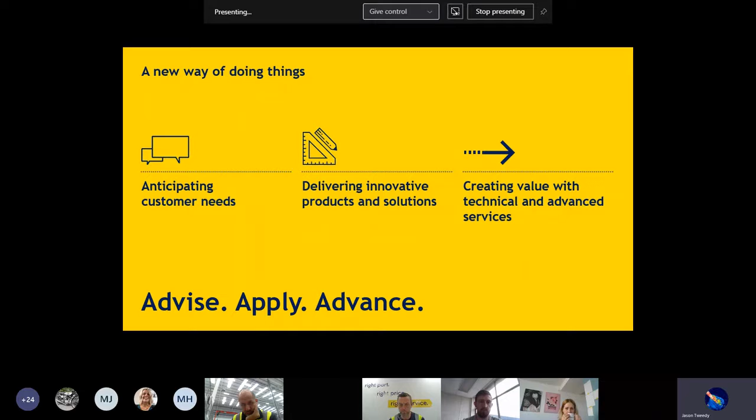To start with some introductions from our side, my name's Jason Tweedy and I am the head of UK Reliability Services for Brammer Buck & Hickman. I started out my working life as an apprentice for Audi as a technician. I've currently been with Brammer Buck & Hickman for 10 years. I started out with Brammer as an inside support and I've worked my way up. I'm now currently qualified and experienced to BINDT and SNT standards in vibration analysis and thermography. And I'm currently part of Rubix's European team on innovation and technical development of technologies relevant to today.

Good morning, everyone. My name is Antony. I'm the Group Technical Director for PCMS Eng Group. We are the Brammer reliability partner in the UK. So a bit about my background: I'm originally from an electromechanical background in the repair industry. I actually started with Dowding and Mills some 22 years ago, which seems like yesterday. I've been involved globally with various different clients, multiple industries, different maintenance and reliability techniques over the years.

I'm also part of the British Institute of Non-Destructive Testing group committees for general condition monitoring, where we're currently developing a new training standard for general condition monitoring, as well as the vibration analysis working group, where we look at examination criteria and so on. And I've recently become part of a BSI standards committee for two vibration shock standards for ISO standard development.

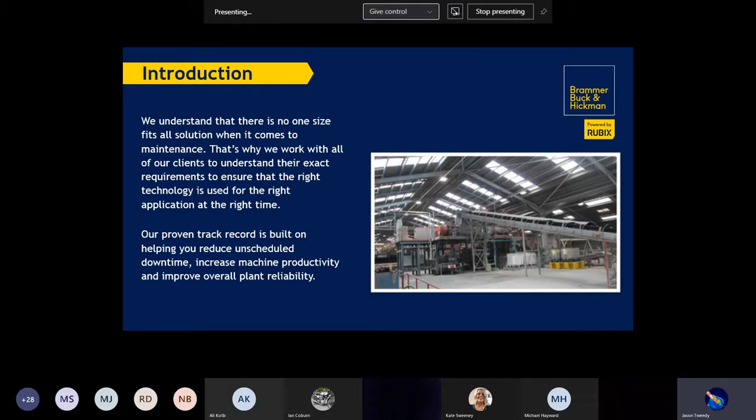So today's approach in this presentation is essentially to give you an overview of reliability services, why we perform these services, and the potential benefits of these to your business. Over to you, Antony. Thanks, Jason.

We cannot sort of assess from a one-shot reading that a bearing will have 2 weeks life remaining or whatever the interval may be. There are a lot of factors that have a significant effect on the failure rates, the failure propagation, between that problem detection through to the functional failure point.

And the main areas that affect that are speed - different speeds. Obviously, the higher the speed, typically the faster the rate of failure on particular assets. Increased load: if the load increases, typically the opportunity before functional failure, the time window reduces. Also maintenance quality, which is a big one, and environmental conditions.

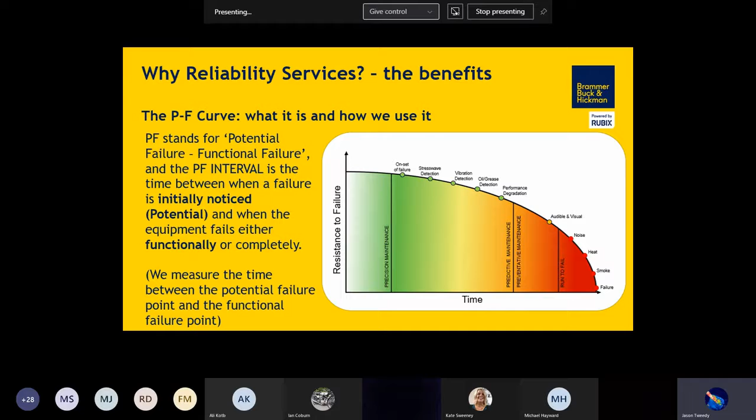Now, in terms of the definition of CBM, a lot of people get this wrong. A lot of people call it condition-based monitoring, which is incorrect. It's actually condition-based maintenance.

So we're talking about maintenance on condition. If you regard CBM as a toolbox, condition monitoring, performance monitoring, standard PPM checks all technically form part of a CBM toolbox. That robust CBM strategy can form multiple assets and different tools and techniques within that. It's not just about the technology, it's as much about human sensors and what are the performance criteria being monitored by certain systems. So where CBM is selected as a strategy, we want to monitor and maintain based on condition instead of just on a time basis.

Then there's key elements that can be experienced from a client perspective as well. We have increased asset reliability. We reduce the maintenance spend as a potential because we're able to plan and optimize repairs. We're able to get spares on just-in-time delivery rather than keeping a huge portfolio of spares in the stores, so we can look at the schedules in place to optimize that as much as possible. Now, this leads to potential increase in productivity because the availability would increase. We're reducing that downtime, we're trying to reduce that interval for maintenance and that mean time to repair. We're trying to reduce the costly failures and make it so that things are small, concise changes and remedial actions to bring that unit back to standard.

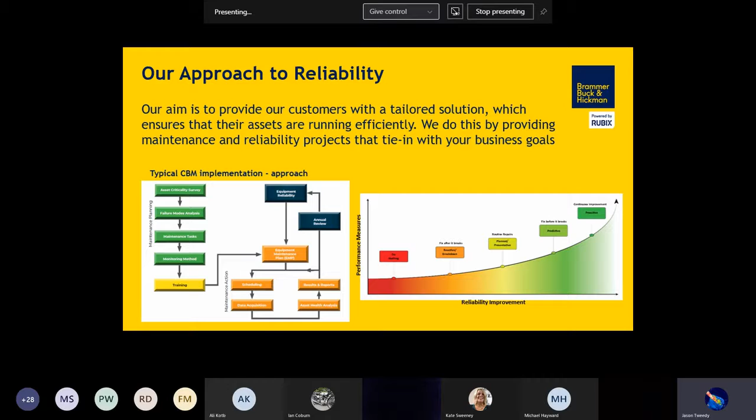Now, the same business can run 2 different sites. Indeed, you can have 10 of the same assets on the same site. They can all operate in a different way, and therefore you need to apply CBM techniques and general maintenance strategies in a completely different way. So as much as we provide the data, the data provides a method of data-driven decisions, as opposed to being subjective and opinionated, it's more around the data to make those decisions in the first place. So there is not one hard and fast rule. You cannot buy something off the shelf and it gives all the answers. Unfortunately, it doesn't work like that. I wish it did, but it doesn't.

Thank you, Anthony. So Brammer Buck & Hickman decided to go into partnership with the PCMS Group for several reasons. The main benefit for all customers is providing a reliable CBM service tied into a fast, effective and high quality repair service. Essentially, if we find something wrong with your equipment, we are able to remove it, inspect it, repair it and return it quickly, and even reinstall correctly if you require. It also means between us, we can give you full UK coverage staff-wise for both repairs and CBM, boasting 40+ engineers out on the road with another 18 behind the scenes repairing your equipment. This also includes hydraulics.

PCMS also have their own independent oil laboratory, meaning market-leading reports with customer-favourable pricing. We are, between us, able to provide accredited training in all aspects of reliability, including CBM data collection tools, analysis, and installation maintenance techniques, and are also a BINDT approved training centre. On the back of all of this, we can bring in our Rubix category specialists to look into any long-term issues or problems that require specialist attention.

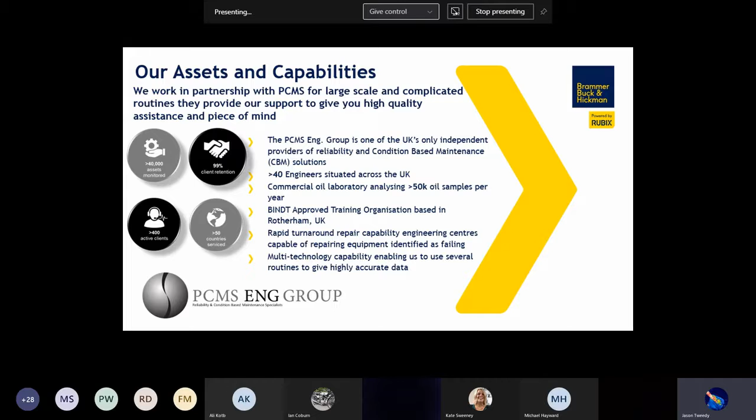So whether you're looking at new machines or newly overhauled machines, making sure assets are in good condition before going back into service, or you're dealing with aging assets, PCMS and Brammer have the tools and technologies available to understand the condition of the machines and also the structures that these machines sit on.

From that perspective, there is not one hard and fast rule. You don't need significant amounts of historical information to make an asset assessment. We can perform things such as one-off health checks to give an indication of the condition of those assets. But let's delve into some real specific details and applications.

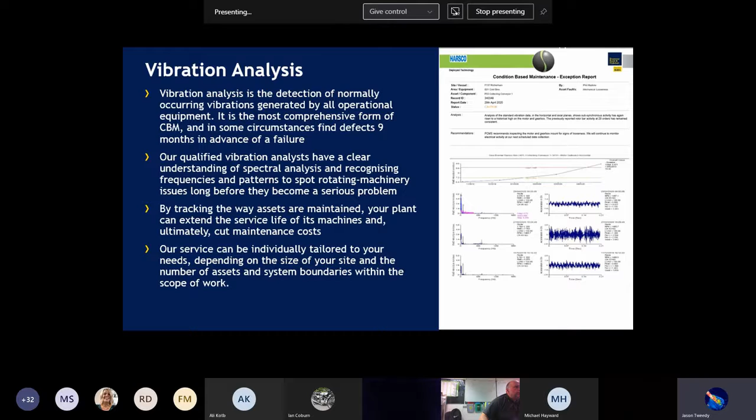So we can act as a complete independent from that perspective. Whatever the size of the business or the number of assets, it's flexibility. There is not one size fits all, as I've mentioned several times. It's whatever is correct for your particular business model, for your business needs. What are the short, medium, and long-term goals?

A lot of the clients that we work with may well start off with a fully outsourced program where we provide the engineering expertise, where we provide on-site services, we provide the data collection, the analysis, the comprehensive reports, and any management expertise that come with it, as well, as you can see on screen with some of the graphs from our Amiga system.

A lot of our clients want to move towards a degree of self-sufficiency, so wireless techniques are now coming to the fore. Online systems are still available also, but also handheld systems are now becoming more accessible to people at site level, so that there is a degree of the want and the requirement for self-sufficiency.

So the next step in that process, moving from outsourced to a hybrid approach, is an element of where we may still provide some routine services on site, but some of the data collection is carried out by you guys, your teams on site, as you develop your reliability teams and so on.

We can provide the necessary training and expertise and technical support that comes with that to provide you with the best opportunity to leverage the benefits from that as an approach, with a view that self-sufficiency may be the next step, where we may be just a supply chain, we provide the training and then just the technical support. We're there on hand with our remote services as required to provide the assistance as and when needed.

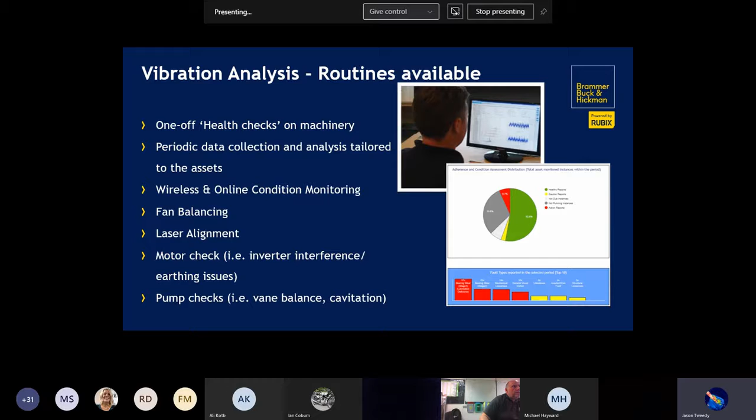Just an example of the power of the data and the approach that we provide. This is a combined PCMS and Brammer client. It's a major UK building product manufacturer. They've used one of our competitors for a long period, and this is not about poo-pooing any competitors, by the way. That's certainly not in our remit.

This is about a client that was in need. So they had an existing supplier. They experienced two major failures, one just before Christmas and one between Christmas and New Year. The same fan, as it was the same failure mode. We've all experienced the 3 o'clock in the morning call outs or the Christmas Eve call outs. We don't want to be in that position. Our job really is to remove the pain and the burden of that, to make sure that that doesn't happen again within your operation and production settings.

So from our perspective, we got a bit of background on this. There was a recent data collection and analysis from the incumbent, didn't show any issues, but the client had concerns because there was a noise, as he described it, from the fan, and he could experience the vibration just by touch and feel. Again, back to the human senses, which are very important.

So we were asked to attend with Brammer to assess and complete a bit of a health check on this fan, and also to fit a temporary wireless monitoring solution, because the concern was changes within the production setting, so air temperature differences. This was also a variable speed fan, so as the variable speed changed, the vibration was noticeably different through different cycles.

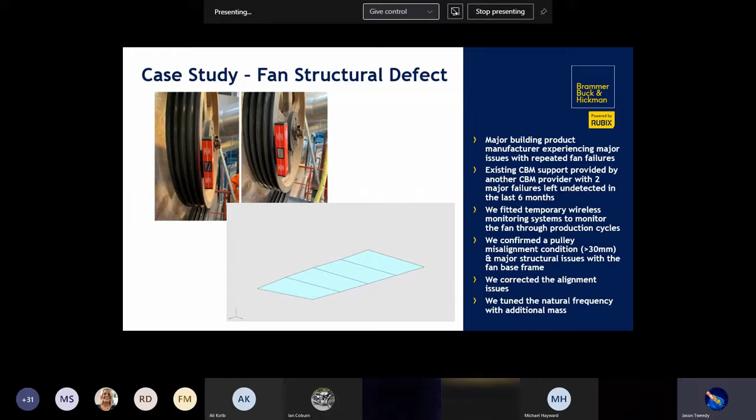And we also carried out a full operating deflection shape model, which determined we've got a major structural weakness, as you can see from the animation. The bit that's flapping around is actually the motor end, which is where the majority of the vibration was being detected. We tuned the natural frequency by adding additional mass. I'll not explain how we added mass, but I'm sure you can imagine. But it allowed the client to drive that fan through to a maintenance period for a major overhaul. So just one example there.

Jason. Thanks, Anthony. So moving on to air leaks. Air leaks are one of the biggest recoverable costs to industry. The issue being that most sites do not recognise the connection between air leaks and high air usage, and the relative costs. Compressor usage, as you can see, makes up the biggest cost of a compressor's life.

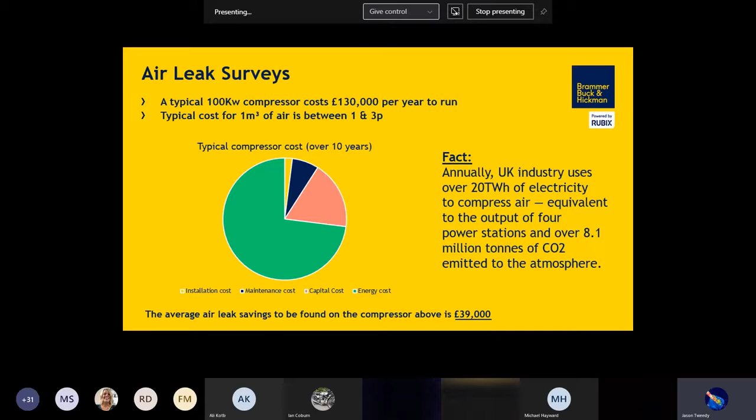This highlights that energy costs are the biggest factor over its life, and that air leak remedials are a quick and sensible solution to reduce this. As a quick example of this, a food production factory in Yorkshire recorded a £217,000 survey in March this year and signed off on a £200,000 cost saving after taking into account the labour time and spares required to repair.

So for the typical start to finish routine, we are asked to go to site to discuss an air leak survey. Once on site, we ask typical but important questions about your compressors and general air systems. We also walk around to scope up the time it will take to perform. We detect the leaks with state-of-the-art leak shooters, which visualize the leak and record the amplitude. The image is also used in the report for evidence.

We record the details of the leak on our own software, which has been designed around customer requirements to give you reports with relevant and accurate information. We also tag the leaks with metal detectable tags where possible, which means finding them to remedy is made easy for you. For ATEX required sites, we are able to use equipment that is safe on site. It does mean, however, no pictures can be taken, but the data recorded is just as accurate otherwise.

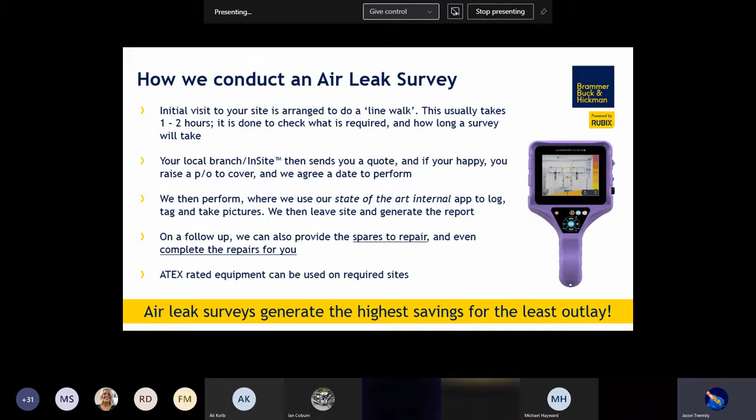Also to highlight, our surveys are also COVID friendly. The way the surveys are conducted means we rarely need to be in contact with people or to touch your equipment. Just on screen are a few example pages of the report that we can generate. The survey can also provide remedial parts lists, estimated time to repair, and also if required, we are able to facilitate the repairs ourselves.

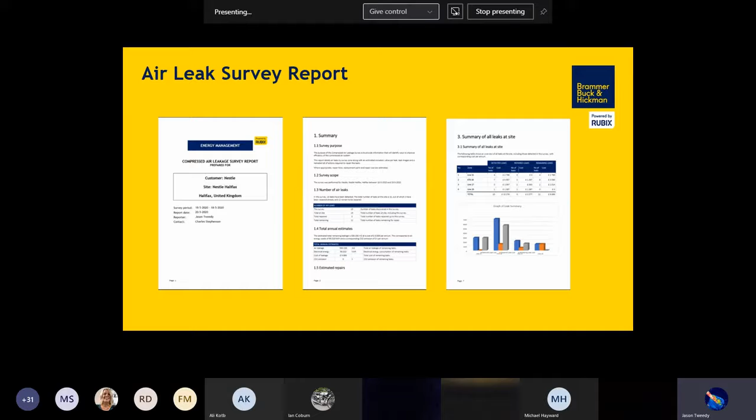The report also breaks down each area, so you can identify critical points or prioritise where to concentrate remedial fixes first. We also are able to log the CO2 emissions created powering these leaks, which if used to fix, helps with obtaining your ISO 50001 accreditation for energy efficiency.

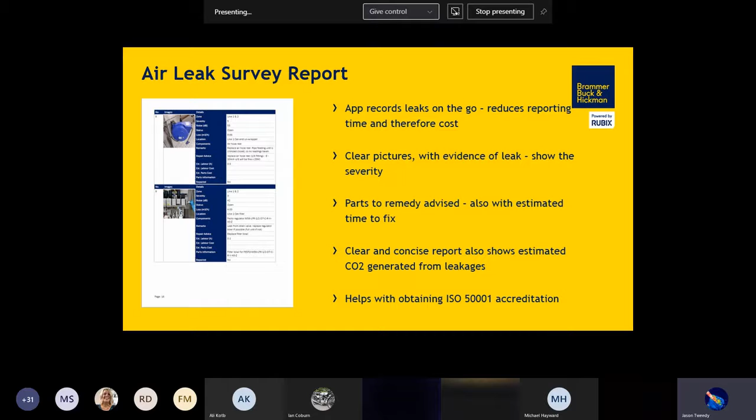So moving on to hydraulic oil cleanliness. So with our hydraulic centres, we are now able to offer you contamination control on your hydraulic systems. The concept of this works similar to the other CBM technologies we've mentioned. We install a particle counter onto your running power pack, which checks constantly over 10 to 15 minutes the status of your hydraulic oil, logging particle counts and other information.

We then present to you this information and talk you through what this means and what remedial action you may need to take. It is a sealed system, meaning the data taken isn't affected by outside contaminants and works whilst your equipment is running, so there is no downtime, is simple and quick to fit, and allows you to see live data concerning your equipment.

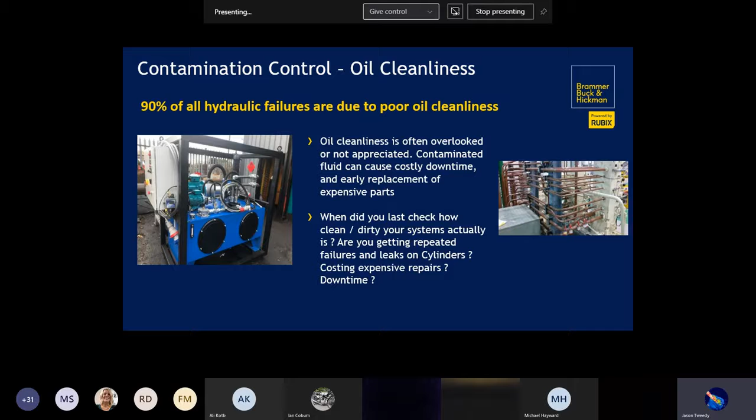If action is required, either an oil change may be suitable or a simple flushing rig may allow us to filter the oil to bring it back up to the correct standard. The flushing rig works by creating a closed circuit in your hydraulic system and forces the oil around turbulently at high pressure, picking up debris and contaminants where the high-end filtration system then filters out. The unit also contains a particulate sensor and so continues to filter until the sensor indicates that the contamination level has reduced to a preset acceptable standard.

Different size rigs are available. The usual hire time is around about 5 days as an average, but we can discuss your requirements, visit your site and quote on your needs appropriately.

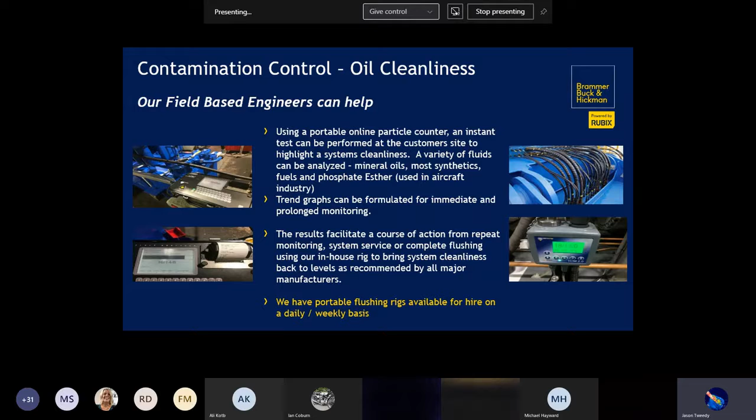So further to the oil cleanliness side, within the PCMS Eng Group, we also have our own commercial oil laboratory, as you may have seen on the previous slides. So lubricant analysis really is looking at monitoring the health not only of the oil but also of the asset itself, and that's one of the key differentials from our perspective. So we're a complete independent oil laboratory. We're not involved with any oil suppliers or manufacturers, so there's no conflict of interest from that perspective.

So where our reports are providing a third-party view, we're really looking at those assets to ensure that that oil is fit for purpose. It's not just about a procurement exercise. It's not related to cost. If the oil is not fit for purpose, the reports will tell you that it's not fit for purpose. But essentially with the oil and grease testing, we look at oils from gearboxes, white metal bearings, from hydraulic systems. We also test used grease samples as well to look for any contaminants that exist within grease.

Really, we're looking at the lifeblood of that machine. So you may have heard that terminology before. It's the same as going for a blood sample at the doctor's surgery in effect. So it gives us a great insight to the running conditions of the asset as well as the condition of the lubricant that exists within.

So when we're collecting an oil sample, whether we're performing the oil sampling or whether we're providing the kits for your guys and your reliability teams on site to complete the sampling, we provide everything that's required. So it's the syringe, it's the vampire pump, the pipe work, the bottles, the labels, which could be pre-printed with predetermined assets information. But as I mentioned earlier on with the crap in, crap out scenario, the more information that can be provided with any sample or data collection technique really does provide key information to improve the accuracy of any analysis.

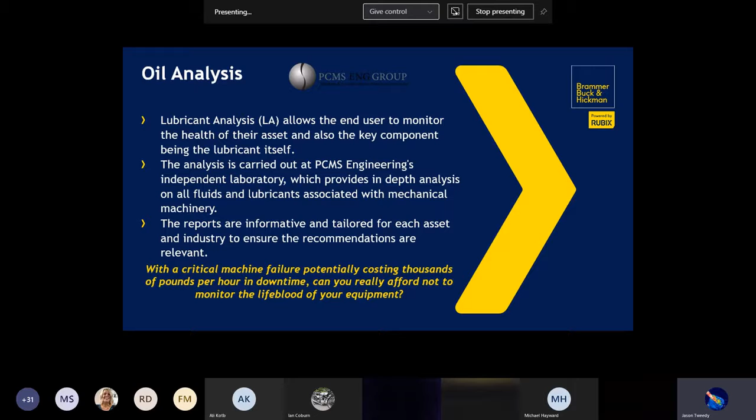So from that perspective, with the potential failure modes that exist on a lot of our critical assets, can we really afford not to have that understanding for what is essentially quite a low cost per sample, the oil sample analysis and the kit that you can collect the sample with? So as long as the sample technique is correct, then obviously we get some good information from that on failures.

We currently process around 50,000 samples per year in our laboratory from multiple clients globally. Our staff are ISO and BINDT trained to lubricant analysis level 1 or level 2. But it's also backed by engineering knowledge as well. So yes, we have chemists. We also have a team of engineers that back up the laboratory as well, so that the output from our reports, as I said earlier on, would never be there's just an increase in copper. It would actually give an indication on where is that copper coming from. We would delve into understanding the asset, where that contaminant or where indices could be coming from.

So we have all our reports that are posted on our cloud-based asset insight tool, which is OMEGA, which is available 24/7, doesn't require any IT software installation. It's on a HTTPS secure system as well on a website. So from that perspective, it also encompasses information from vibration analysis, oil analysis, thermography, any of the techniques applied in CBM, and also any inspection techniques as well that we collect during our standard routines. So really it pulls all the pieces of that jigsaw together to give it all on one view. It's license free, any logins as required, which is a big benefit.

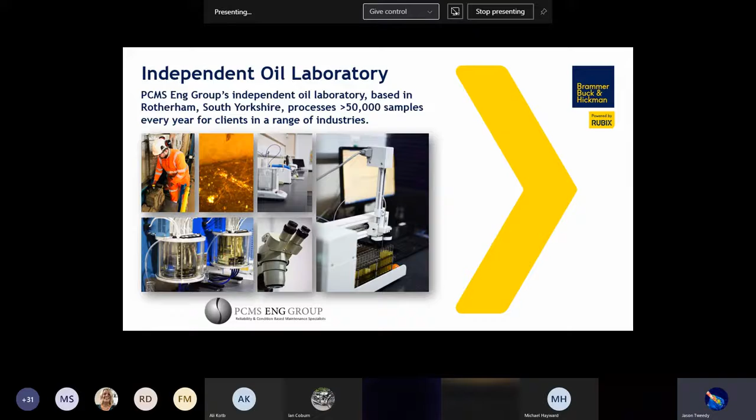We've also recently introduced turbine oil sample testing as well within the laboratory, which is quite a specialist piece of equipment for looking at the remaining life expectancy of oil samples. So when you're looking at the outputs of the oil reports, they're typically split into a trivector, which by definition has 3 sides. So we're looking at the wear elements, the contamination index, and the chemistry. When we're looking at the chemistry, for example, we're looking at additive packages, the level of viscosity, the general lubricant performance, is it still fit for purpose, is it showing signs of oxidization, and so on.

At this instance, we may actually compare that with what is termed as a virgin sample or a barrel sample to understand what the oil was at the outset when it was in the barrel before it went into the asset itself. By performing that check, we can directly compare what it should be to what has come out of the unit itself. And that opens up a window of opportunity to understand, is it past the end of its useful life? Is there an issue with dilution of some other oil type within there where perhaps the lubrication management standards are not up to scratch on site? So there's various elements within that chemistry arm that provide that required information.

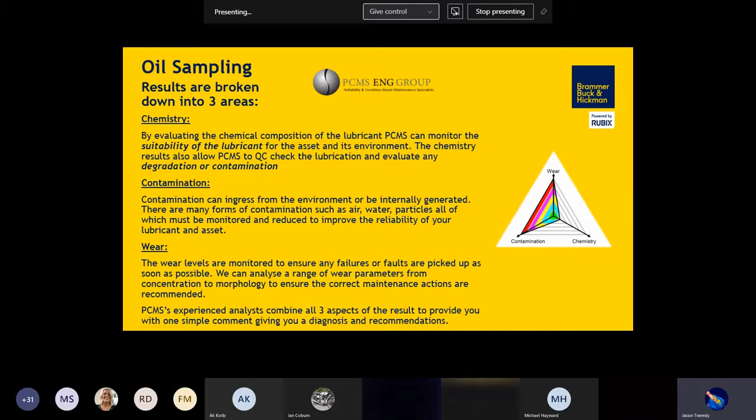Contamination, so this could be internally generated, or it could be generated during the sampling itself if the sampling is not done to the correct standard. But it could also be abrasive dirt that's got into the system due to a seal failure. It could be water, could be fuel dilution within an engine or a piston ring problem, and so on. And down to the wear indices, where we're looking at specific particular elements that show friction, abrasion, and erosion particles where surfaces are moving together, or it could be from corrosion as well if moisture exists within the system. And we look at the size, the shape, the material of the part. Yes, it's wearing, but how is it wearing? What is causing the problem?

So from an oil analysis perspective, we regard our services as a managed service. We do carry it out on multiple different assets. Our oil analysis service is not just about the oil condition, it's about the asset condition. As I've mentioned, we've got the analysis. We're also a BINDT accredited organisation to deliver training to BINDT Category 1 and Category 2 for lubricant analysis. And obviously, I've mentioned the cloud platform as well.

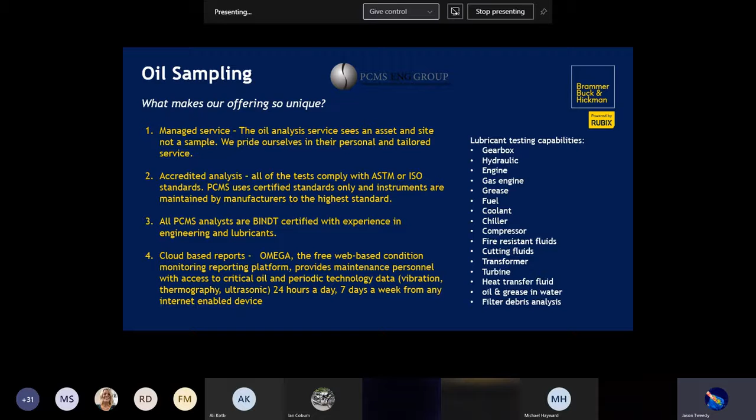Very briefly on a case history, which is a bit of a strange one. It's not always just about used oil analysis. This is an example of an oil hydraulic system where the filters were continuously blocking up with no specific explanation as to why. So we were basically sent the entire tank, which was amazing and quite interesting. So through microscopic analysis, we determined that it was non-ferrous particulates that were in dispersion within the oil.

We actually went about to take what were termed as core samples. So we took a hole cutter, for want of a better description, with various tests with different oil types, different temperatures, different pressures, to determine what could be happening within that particular system. And what was actually found was, almost like a perfect storm, through various temperatures and pressures, the tank itself was actually starting to delaminate. So that was the particulate that was going into circulation within the system.

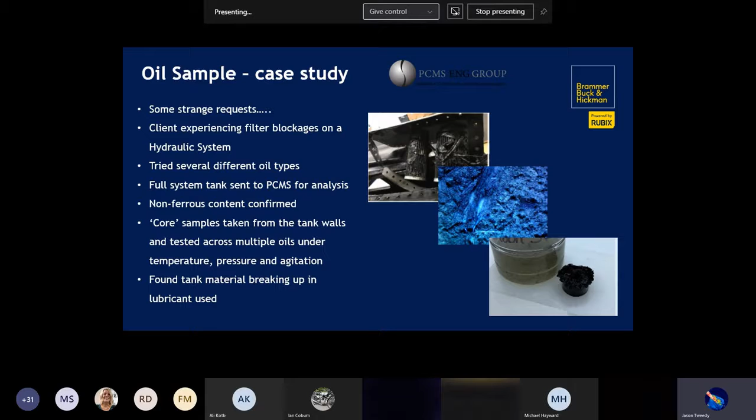So we determined that actually there was a lack of a tank liner within the system that was actually the ultimate root cause of the problem. So very strange one. So it's not always just about rotating assets on gearboxes and so on.

Jason. Thank you. So moving on to thermography. Thermography is the inspection of abnormal thermal levels and patterns emitted by an object. As with vibration analysis, if we do this over time, we can trend the information to spot anomalies. We can also use this to do one-off checks, i.e. electrical panel thermography or silo tank level checks. Either readings outside of ISO standards or spot readings that differentiate from other sensors. Again, as an example, tank levels.

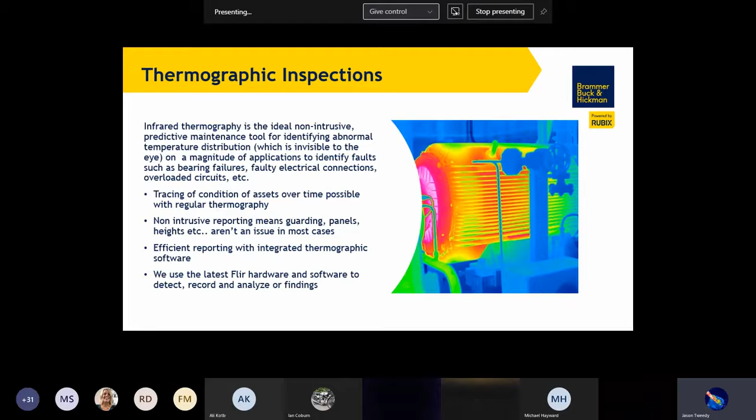Using state-of-the-art equipment along with experienced and qualified engineers, we are able to advise of potential faults as well as providing the service to rectify where possible. Thermography can be used across a wide variety of applications, including refractory kiln testing, transformers, building insulation and energy loss, solar panel functionality, and steam traps, as well as the following.

Electrical panels. Thermography is the only preventative maintenance technology that is effective for identifying problems with poor connections, overloaded cables, and faulty electrical equipment safely, and without any disruption to the normal operation of your business. Moisture detection. Mold and moisture can cause extensive damage to buildings and health problems for tenants, so we are able to offer thermography as part of building inspections.

Motor and gearbox inspections. The extra load on a bearing caused by misalignment will often cause increased temperature at the bearing, which can be seen with thermography. Bearing wear and over lubrication will also cause a significant increase in temperature. And finally, pipe insulation lagging. Thermography allows the user to find lagging defects and leaks in long pipelines. Our reports are clear, concise, and advise recommendations to remedy the issue using the latest reporting software.

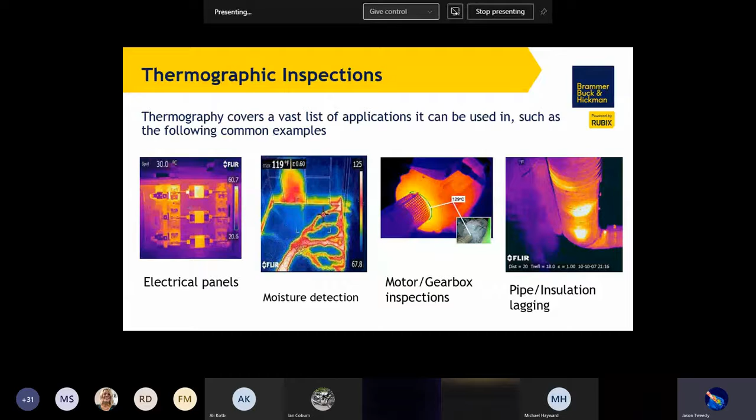The lubrication. So for your lubrication needs and requirements, our team can provide the relevant goods and services to keep your equipment lubricated correctly. As Antony mentioned previously, the consequences of poor or inadequate lubrication usually entail higher maintenance costs, increased time, and even higher chances of work accidents. By lubricating equipment at the right time with the right amount, your equipment lasts longer, reduces the need to service, and increases machine performance.

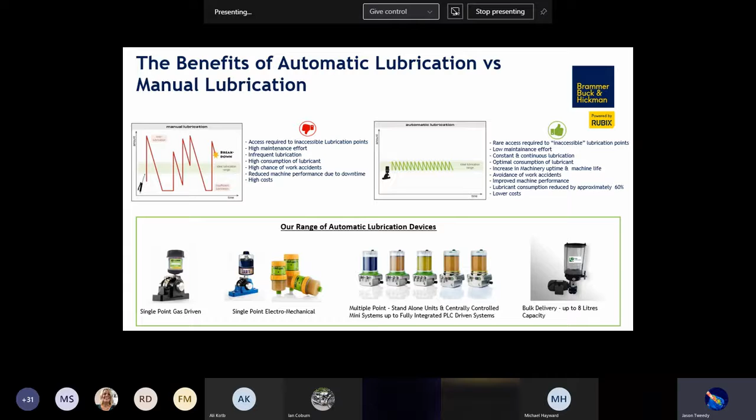We can offer solutions, as you can see on screen, from single-point lubricators all the way to full modular systems, from 15ml lubricator pots right the way up to 8-litre tubs on an auto lube system. Brammer can cater for all budgets and requests, and we can even install in sections, helping to reduce the cost along the way.

Just a couple of examples of who we work with. First one being Kerry Foods Hartlepool. Now this started out as a small inquiry and has now turned into 2 days on site with condition monitoring. We have found issues and breakdowns have been prevented. It has also led to an Insite being implemented there, such was the quality of the work.

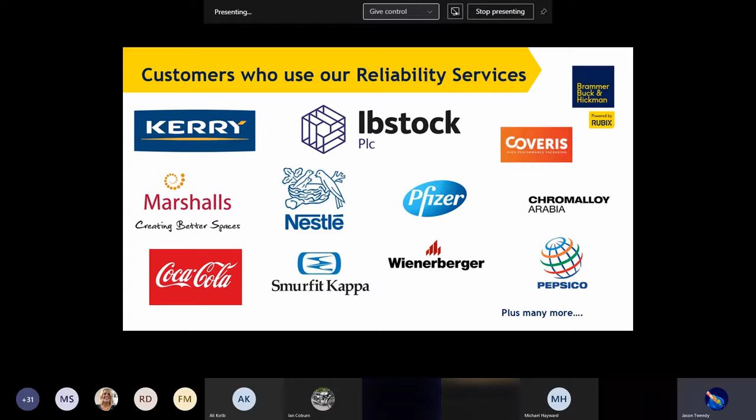At Coca-Cola, our state-of-the-art air leak survey system, along with the latest equipment and trained engineers, means we now have the contract to conduct not only all of the UK's air leak surveys, but the repairs to rectify as well. And Ibstock as a group, we have gone from working on 2 sites to being engaged with 8 sites and working monthly regularly, 5 in the space of a year. And this is set to expand over the year to more sites.

So what happens next? So, moving forward over the coming days, our local teams will be in touch to discuss the presentation for feedback if there's anything of particular relevance that could help prevent downtime within your site's factory. Once you've had the initial conversation with the local teams, our field service engineers and, if required, PCMS will happily visit your site to look at any challenging applications with the aim of offering solutions.